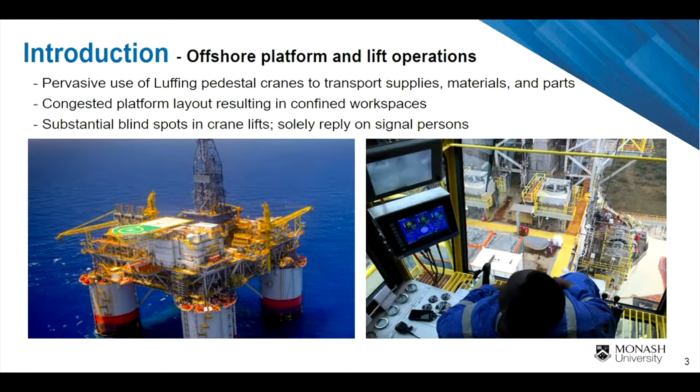And there is also other research in terms of using real-time location systems, RFID or ultra-wideband, to try to track the location of the tags mounted on the crane parts. So we can get the absolute location of these crane parts in real time. And also there are other attempts in using LiDAR or vision-based methods to track the pose of cranes and other heavy equipment and visualize the motion of the pose in real time.

But they're subject to some limitations in terms of the occlusion of the site and also the system setup. It requires a permanent or a reliable setup of the LiDAR or camera system. So here our objective is to find an accurate and robust way to sense the crane motion in real time and also visualize it to the operator in real time.

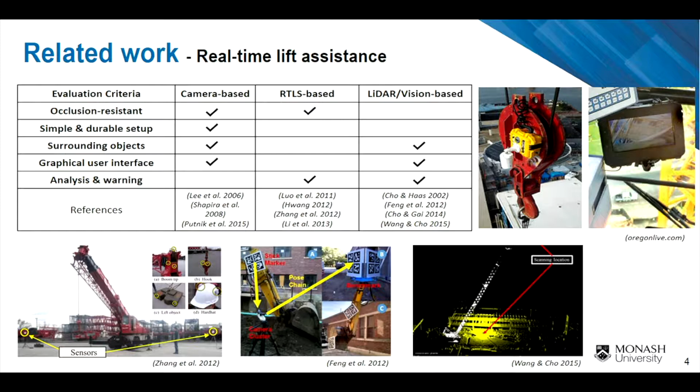So the first task we're trying to accomplish here is to capture the crane motion in real time. So the angle of the boom, the slew angle of the entire superstructure. And this work was inspired by some early work from Dr. Ghang Lee from Yonsei University. And here we're using rotary encoders and digital inclinometers to capture these critical motions in order to reconstruct the entire crane motion in real time.

And the second part, which is very important, especially in the offshore platform, is to monitor the load sway, because the operator has in many cases a very narrow corridor to maneuver the load. So it's very important to monitor load sway, either as a result of excessive maneuver or because of strong wind. And here we propose two methods.

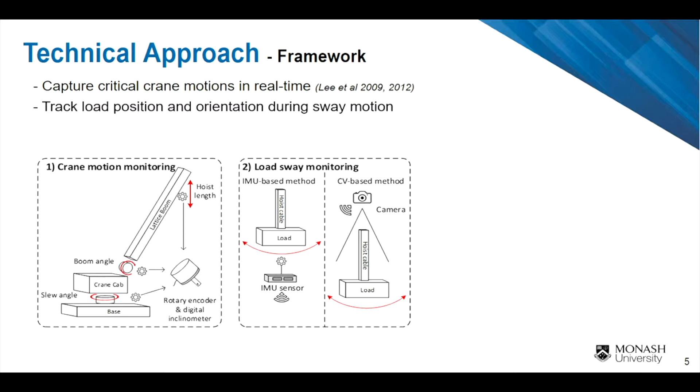One is using an inertial measurement unit to try to capture the orientation of the load, and then transform that to the absolute location of the load. And another method is using computer vision with a camera image captured by a top view camera, and try to track the location of the load in the image frame. So I'll explain why we use two different methods and in which scenario they're more suitable.

So eventually, when we have the crane motion and load sway motion, we need to integrate them, fuse the data, and visualize it to the operator in order to assist the decision making and operation. So the visualization and user interface is designed to assist the operator in real time. And at the same time, we want to minimize the disruption to the operator's routine work. So I'll explain later how we integrate the voice control to free the operator's hands with the user interface.

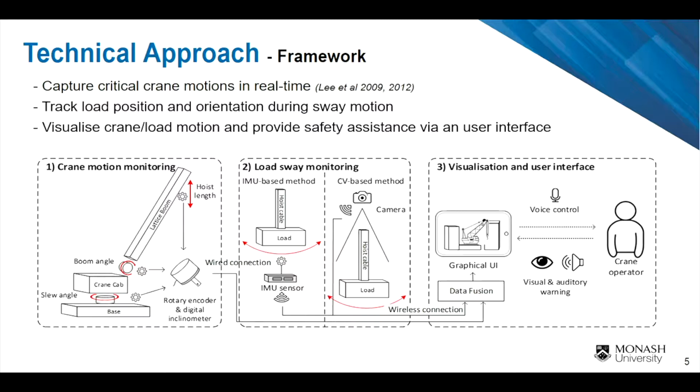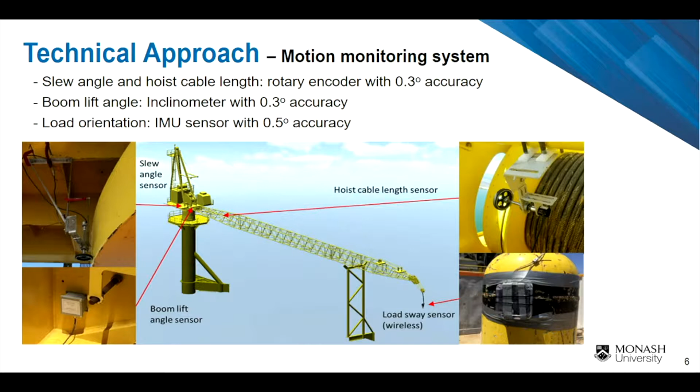So this is how we set up and deploy the sensor system. We use the rotary encoders to measure the boom slew angle and the hoist cable length. And we used a digital inclinometer to measure the boom lift angle. All these sensors are wired to a central unit to collect this data. And then the IMU sensor, we mounted on the hook block, and that is wirelessly connected to the receiver of the IMU sensor. So in this particular experiment, we used the IMU method, and I'll explain how that worked out.

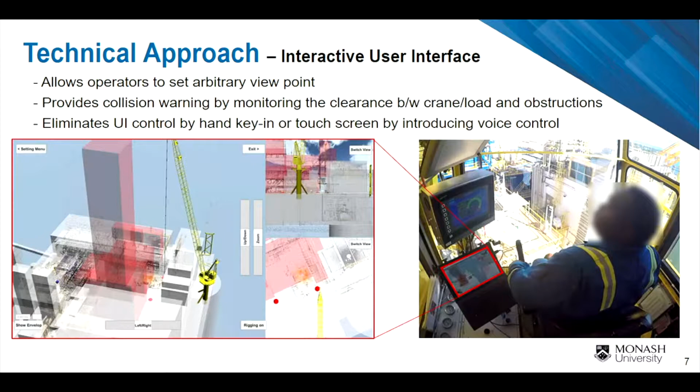In terms of the visualization and user interface, we used an 11-inch screen and visualized the real-time crane motion in the crane cab to the operator. Here you can see the background is constructed beforehand, based on the point cloud laser scan of the platform. This user interface will allow the operator to change the perspectives in order to avoid any blind spot, and also monitors the clearance between the load and other crane parts to the surrounding objects. So it can provide warnings to the operator in case of any violation of the safety threshold.

So we did a case study with our industry partner on one of the biggest offshore platforms. This platform has two cranes on board, and we actually went there and did a laser scan and built this point cloud data of the platform. And then we manually built this 3D model in order to reflect the platform structures in the user interface or in the virtual environment.

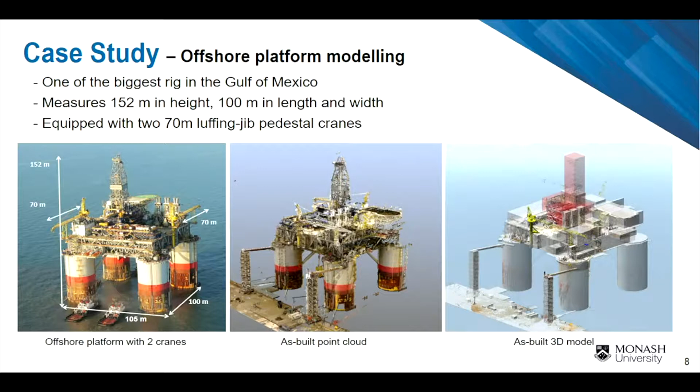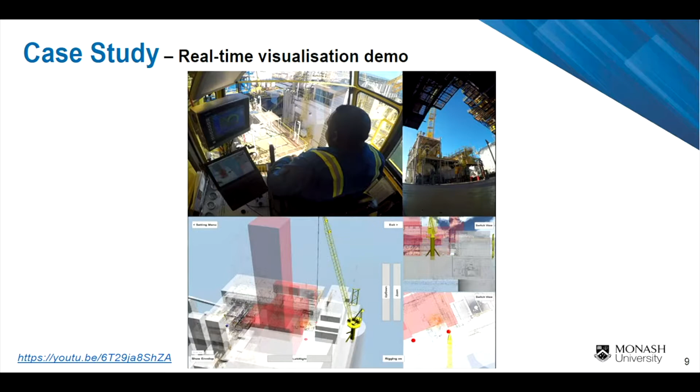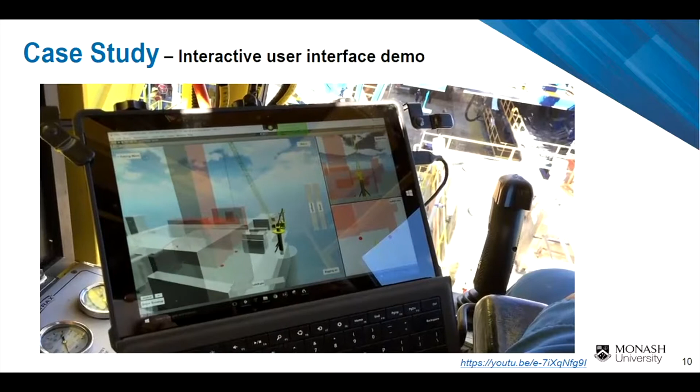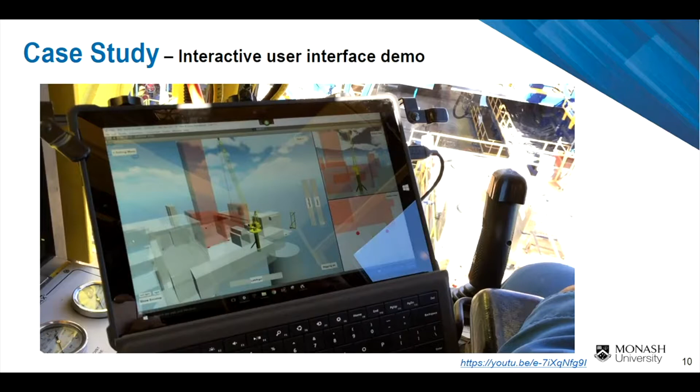So just a quick video showing the voice control. It's still an early prototype, so there's a little bit of delay between the command and the action in the program. Zoom out. Right. So we didn't develop the algorithm from scratch. It's a commercially available product. So what we did is integration with the Unity game engine to realize this function.

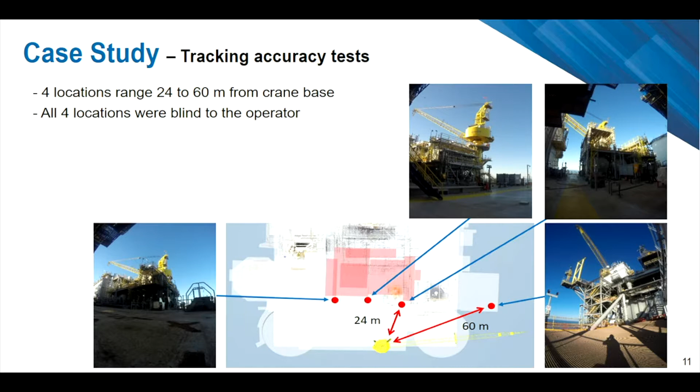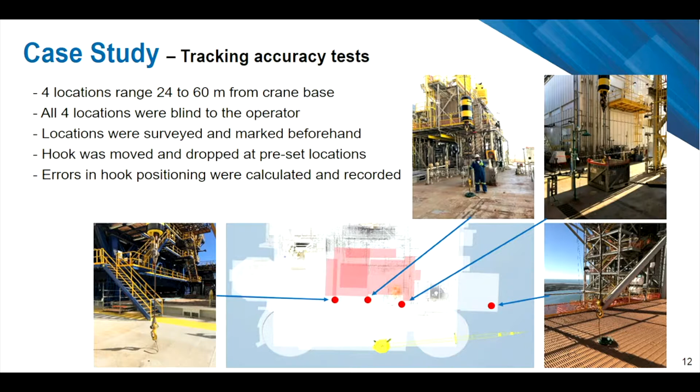And of course, we're interested in the accuracy of this system in terms of tracking the hook or the load position. So we did some preliminary tests. We chose 4 blind lift locations on the platform, and then we tried to find the positioning error of the system. And the end result is actually not to our satisfaction. It has an average horizontal error of 0.9 meters and 0.7 in the vertical positioning.

This error is partially due to the sensor setup. I mean, it's a temporary setup for the sensors. So eventually, if we can work with the crane vendor or manufacturer, we can integrate the sensor with the crane system itself. So that error can be minimized.

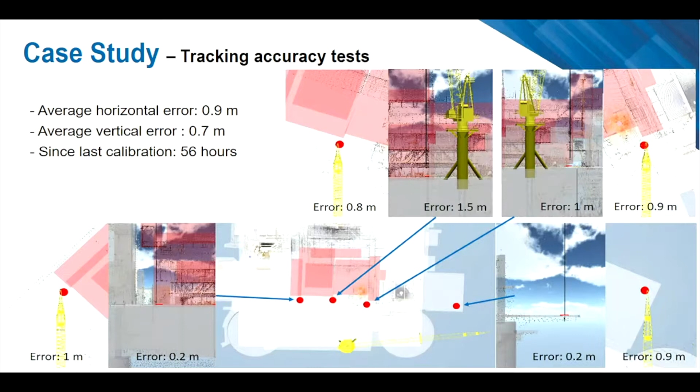But actually, the major contributor here to these errors is because of the IMU sensor we used. Because you know the magnetometer on the IMU is very sensitive to magnetic interference. And this whole platform is a big piece of metal. So that actually created a big problem for us. So actually, when we came back from the experiment, we wanted to investigate another method, particularly in the offshore platform scenario. So we explored a computer vision method.

So basically we use the load camera, the crane camera, to capture the load from top view. And then we first convert the color space from RGB to LAB. And then it involves some manual process in terms of specifying the foreground color for the load. And then we use an expand and contract scheme to track the load position across image frames, and then construct a bounding box to reflect the load position in the image frame.

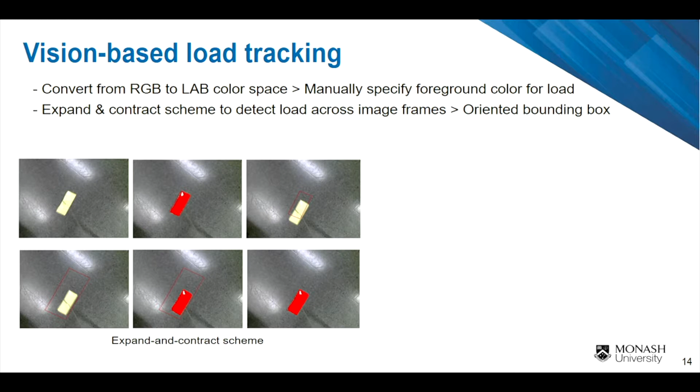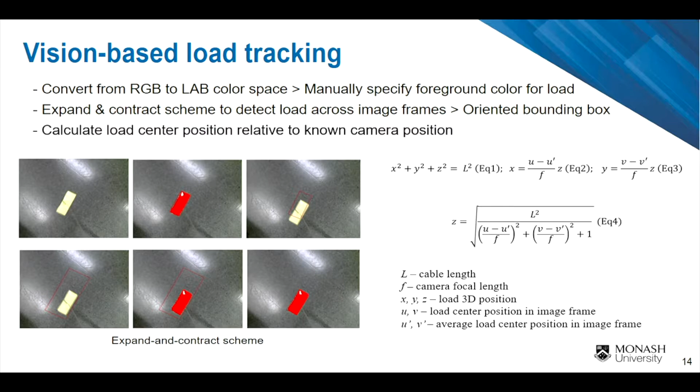And then with the known length of the cable and the focal length of the camera, we can calculate the relative location of this load to the camera location. And we want to understand how this method performs in the lab test and the field test. So first, we did an indoor lab test. And we basically made 2 scenarios.

One is with a very simple background. Another one is a more complex background. And we want to understand how the method performed with different complexity of the background, which is a big factor in the offshore platform or any crane lift operations. And we also set different cable lengths, because that also affects the accuracy of the vision tracking.

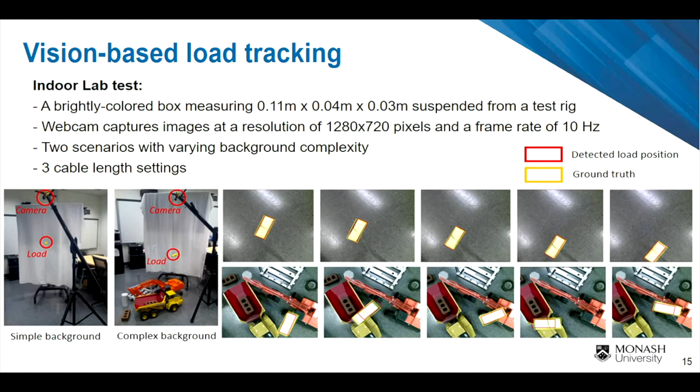We also used the footage from an earlier experiment out in the field, trying to see how the algorithm performs in real time, in a real life setting. And the red square shows you the tracked load position as a result of the algorithm, and the yellow one shows the ground truth.

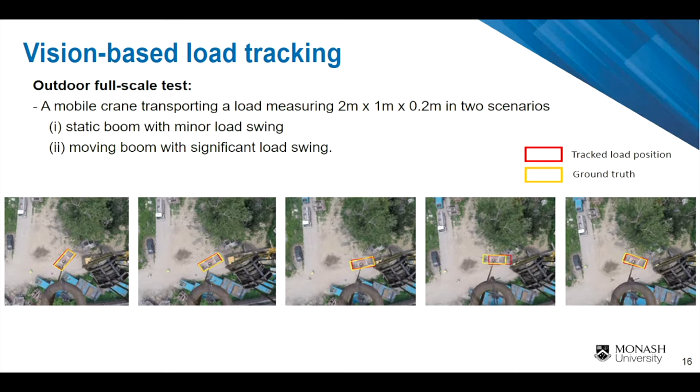And eventually, we had 8 scenarios in indoor and outdoor tests with different cable lengths. And that shows us how the algorithm performs in different settings. And the mean position error is from 0.2 centimeters to 15 centimeters. And we are also interested in the rotation error, because if we want to very accurately track the load position, we also want to know the rotation orientation of the load, especially when it's a rebar or a linear load.

So we found that the tracking accuracy is sensitive to the background complexity and cable length, and that's definitely something we want to improve in our future work. So one possible solution is to attach a visually significant marker onto the load, and that's something we want to try next.

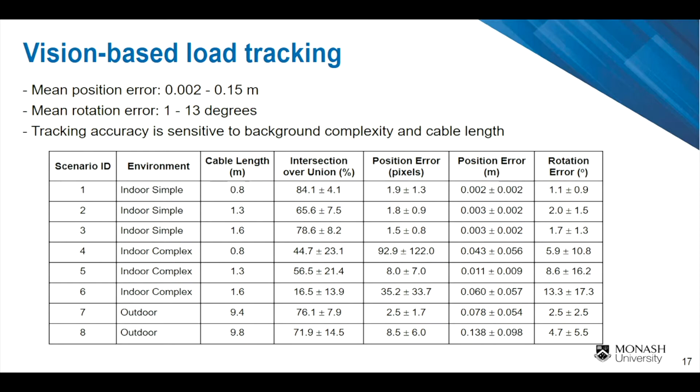So in conclusion, we proposed a system using real-time sensing and visualization, and the purpose is to increase the safety and operators' confidence in blind lifts. And we also see a big benefit of this type of system in remote controlling scenarios. We actually see a lot of small cranes in residential buildings using remote control, where the operator is on the ground.

And in our next step, as I said, we want to improve the accuracy and robustness of the computer vision-based method to track the crane load. And we're going to have the second phase of the experiment on the offshore platform, where we want to test out how it works in real life. And also, currently, the computer vision part is offline; it's not processed in real time. So that's another work we want to do in the future.

And we also want to understand how the operator and the lift crew actually perceive this system. So the usability and effectiveness in terms of improving the lift safety and productivity performance is also very interesting to us.